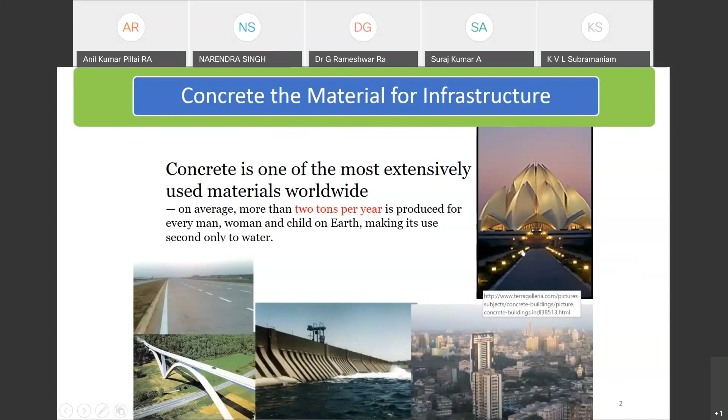So starting off, like I mentioned, I'd like to talk about innovations in concrete for sustainable construction. So what is this material? It's actually the second most widely used material on this planet. It is second only to water. It's about 2 tons per year for every human on this planet. So in terms of its usage, it is enormous. So obviously that comes with a very large footprint. And for us to be sustainable, we have to look at the issues that come about from the usage of this material. Now, concrete is made with cement.

If you look at cement, the past, present, and the future, this is the cement production as it was 2 decades back, what it is today, and what it is expected to be in the future. The red is the Chinese dragon; they are the largest producer today, because of the enormous development in infrastructure in which they invested, which has allowed them to become the second largest economy in the world. Now the blue there is India, and we are on the cusp of enhancing our investments in infrastructure. The current estimate is about $2 trillion of investment has to go into infrastructure if we are thinking of becoming a $5 trillion economy.

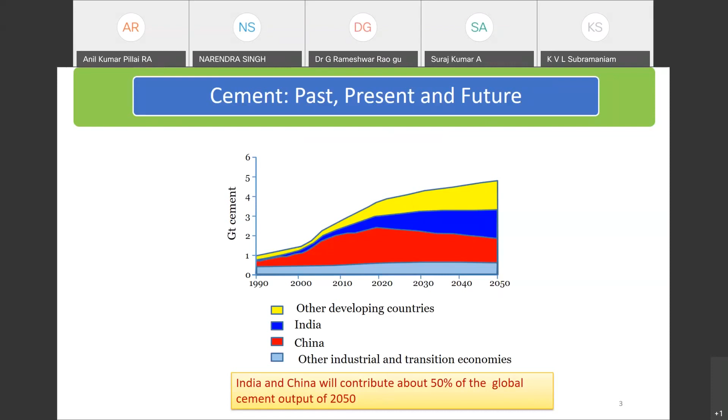And that is needed in critical sectors like infrastructure, primarily highways, roadways, transportation, structures, and water systems. This is all needed to support the growth that we are projecting. The 7-8% growth that we want in our economy will only happen if we have the infrastructure to support it. That infrastructure can only be developed if we keep producing concrete, and that concrete can only be produced if we keep producing cement. The projection for India is by 2050, we'll probably be the largest producer of cement. Of course, this is a projection. And to sustain it, we need to find the challenges in continuing this production assuming the business as usual model, or do we need a disruptive change? Now, what are the biggest challenges in cement production?

Well, one of the biggest challenges in cement production is raw material. If you look at our projected demand of cement in 2050, we need 750 million tons per annum, and that is an enormous demand. Limestone is a critical ingredient that goes into making cement, and our best estimates are that limestone is going to last us another 35-40 years, which means the business as usual model will not work. We have to look for alternate solutions, alternate materials, alternate cements, because there is a material limitation.

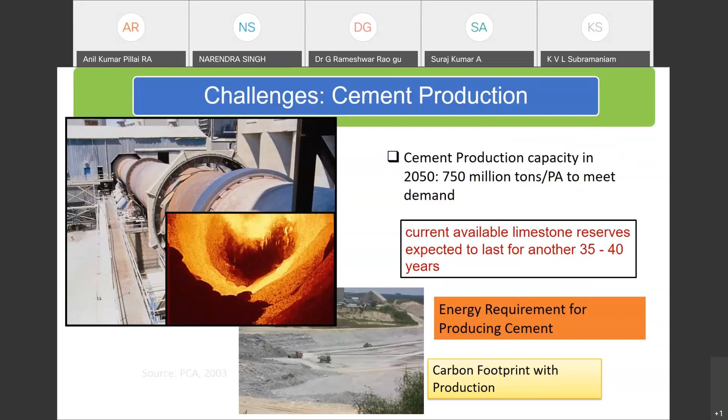Cement is a material that has a very high energy requirement, and we have to gear up to be able to produce the energy. And as a material, it has a very large carbon footprint. In fact, it is the second or third largest anthropogenic source of carbon dioxide in the atmosphere. So it has a very large environmental impact. These are the current challenges, and the cement industry has to gear up, because without cement there is no concrete, and without it we will not be able to produce the infrastructure that we need. So what about construction? We are still stuck in the old form of construction, particularly with concrete. We still assemble formwork on site, then we pour concrete, we let it harden.

It's a 28-day process. So A, it is time consuming. B, I am limited to what I can produce in the field. And oftentimes that is not the most efficient use of material.

So when I'm talking about rectilinear shapes, primarily rectangular shapes, most of our beams and columns are rectangular, and that is driven by constructability, because this is what we can construct with ease. But these are not the most efficient structural shapes, which means we're using material more than we are required to, and of course that increases the material demand. So we need better forms of construction which allow us to go and produce shapes optimally designed structurally.

And suppose I wanted to produce a shape as I've shown here on the left hand side, producing that on the field is not possible, which means we need to come up with new construction technology, which basically takes us into a new domain of form-free construction, where we are talking about construction without the use of formwork. And that's a new challenge that has come about from the construction side of concrete.

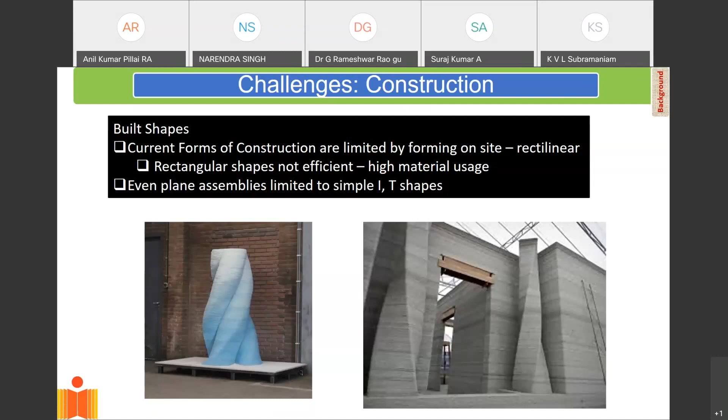Then we're talking about challenges in construction. We're talking building faster now, because gone are the days where we would like to wait for years, and quick turnaround has become important. And some of the stumbling blocks that we encounter when we're building faster with concrete is on site. While forming on site is an advantage, it's also a disadvantage, because I have formwork cycle times.

Basically, formwork takes time to assemble, then it takes time to disassemble. I need skilled labor. And of course, reinforcement has to be integrated with it. So it's a time-consuming process. And oftentimes, this is what slows down concrete construction.

So we really need to look at this in order to have efficient construction, which not only addresses the material demand, that is, we use the material in a very efficient manner, but also have efficient construction technology, which allows us to build faster, essentially getting into the domain of looking at construction maybe from a manufacturing perspective.

So looking at construction technology and bringing in newer forms of construction technology, which allow us to overcome these traditional roadblocks which have come about from the traditional way of thinking. So we have to start looking at things more from a manufacturing perspective. And we are heading in that direction, where now we're talking about additive manufacturing and 3D printing of concrete, where a lot of research is going on. And slowly it will become mainstream in construction.

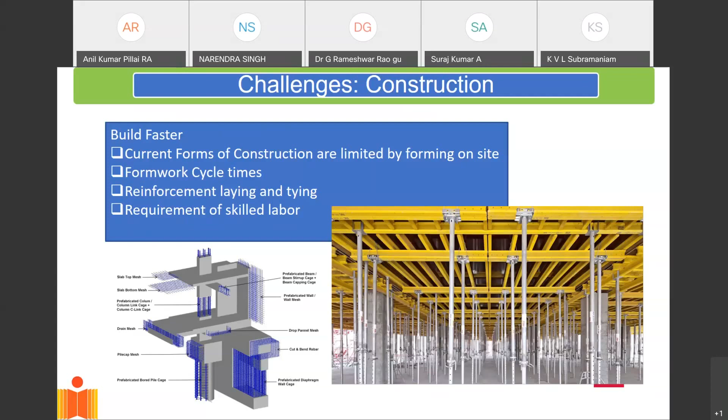So what are the solutions? I've listed the problems. Now, clearly cement is the backbone. We have to look at cements. So we have to look at alternate cements. So we have low clinker factors, and clinker is what goes into making cement. It is the essential material that goes into making of cement. Clinker is ground to produce cement. So we have to minimize our clinker usage in cements.

That will lead to a reduction in the cement utilization and will allow us to stretch our resources for more time. The other alternative is to look at alternative clinker-free cements. So look at cements which are not produced using limestone or using the Portland cement manufacturing procedure, but maybe making cements from waste material, which is the ultimate paradigm in sustainability, because then we are very sustainable. We are essentially utilizing waste material from other industry to produce something that is useful in our particular usage.

Then alternate reinforcement, and this is one of those things that is now being thought about, because if tying of reinforcement, laying of reinforcement is a problem, then maybe we can think of integrating reinforcement with concrete at the time of mixing, and then providing reinforcement as and when it's needed. This also allows us to bring in alternate forms of construction technology.

Efficient construction. So we are talking about identifying the labor intensive processes which slow us down, and looking at form-free construction, basically printing concrete, delivering concrete in the shape we want, shapes which have been optimized for structural efficiency, so that we use the optimal amount of material and not what is dictated by what formwork I can assemble on the site.

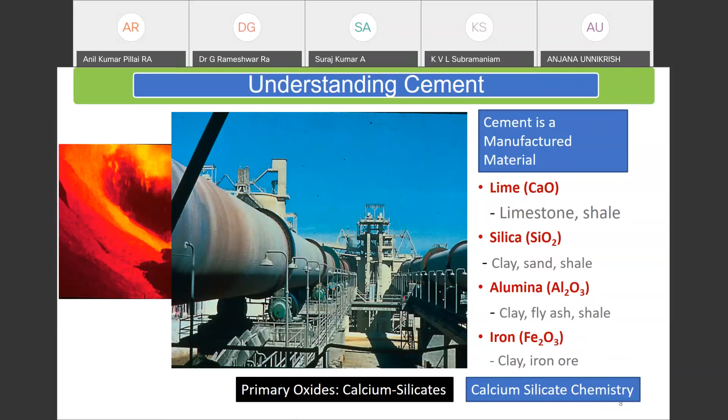It also gives off a lot of CH, which is calcium hydroxide, which makes concrete very alkaline. So basically, concretes are very, very alkaline. They produce a lot of calcium hydroxide. And the calcium hydroxide basically doesn't contribute to strength. It's just a byproduct of the reaction.

So one of the earliest attempts to reduce the clinker, which is what gives us these calcium silicates, was to look at this calcium hydroxide, which is sitting idle in the system, and utilize it by dosing additional forms of silica. And as luck would have it, we found additional forms of silica from waste materials. These are identified as slag, fly ash, metakaolin. Slag and fly ash especially are waste materials coming from other industries.

Slag is a waste material which comes about during the process of extracting iron from iron ore. And fly ash is what we get when we burn coal to produce electricity. It's the ash that is left behind. That is what we call fly ash. And both of these materials have silica in them.

So when I have an extra source of silica, which I add to the cement, that silica is able to utilize the calcium hydroxide that is given off by the cement reaction, and is able to produce additional CSH, additional calcium silicate hydrate. And these have been in use. So that has allowed us to reduce the clinker factor of cements.

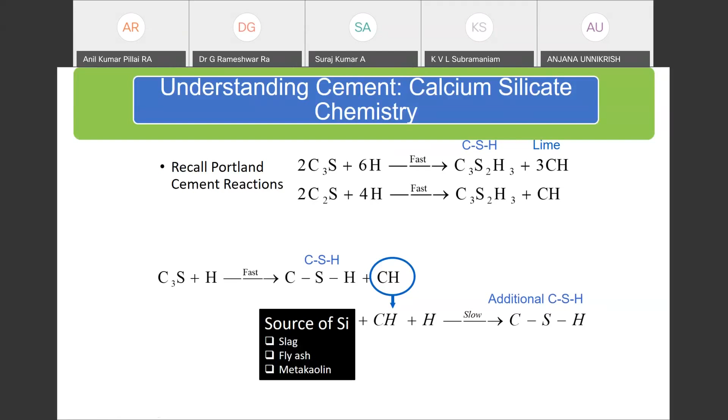And now the cement companies, working with the researchers and the standardization agencies, have standardized the addition of these supplementary cementitious materials. So slag, fly ash, metakaolin, these are all supplementary cementitious materials, which are used as a replacement of cement in Portland cement. So now this has become commercial, where we're able to reduce the clinker factor with the use of these waste materials.

So just to give you a little background of these waste materials, we use slag in a granulated form. It's basically the gunk that floats on top of molten steel that is quenched very quickly, and it produces a highly reactive glass, which is what we know as slag. And the slag is very rich in silica and calcium, which are the main ingredients of cement. And so we are able to use it as a cement replacement.

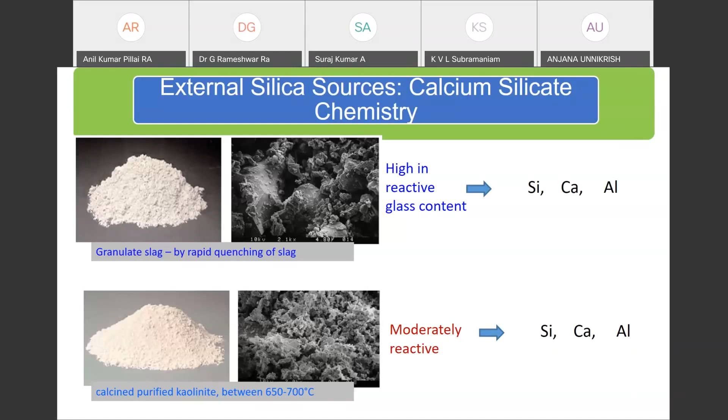Metakaolin is actually something that we produce by calcining clay. We calcine clay at 650 to 700 degrees Celsius. It's moderately reactive, but again contains silica and calcium. Therefore, we are able to use it as a clinker replacement.

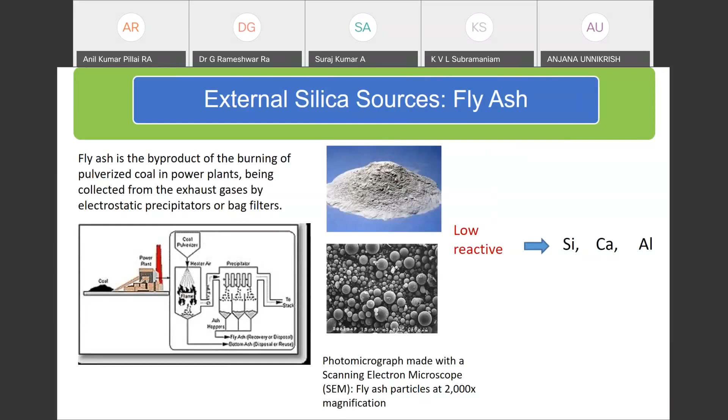But coming to fly ash. Fly ash is a waste material that is produced by burning coal, and it's a grayish powder. Fly ash is a low reactive material, but it contains silica and calcium. So if we look at silica replacement in cement, the way it works is that if I look at cement, I have calcium, silica, and alumina.

And if you look at any of these waste materials like slag or fly ash and metakaolin, they basically contain calcium oxide, silica, and alumina. And I'm basically looking to replace the silica in the cement with the silica that comes from these waste materials. So basically, as a silica replacement, this has now become very standard. Replacement of cement with these waste materials is now a very standard way of reducing clinker factor in cements.

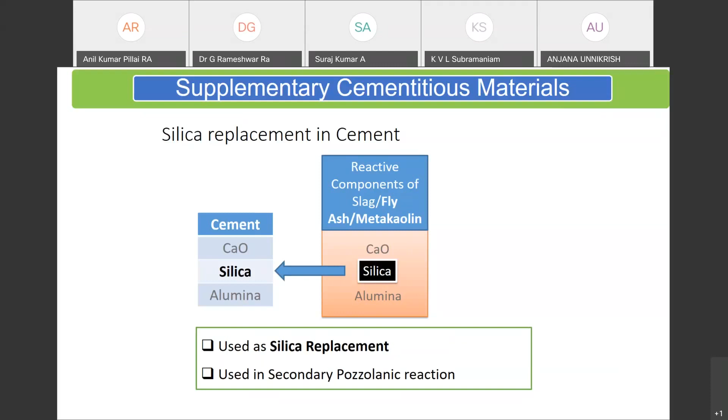The issue that we have is that the coal that is consumed in India is an inferior grade coal. So it basically produces a lot of ash. The ash content of coals tends to be as high as 50%, which means 50% of the coal that I burn is left behind in the form of ash. The average number is around 32%.

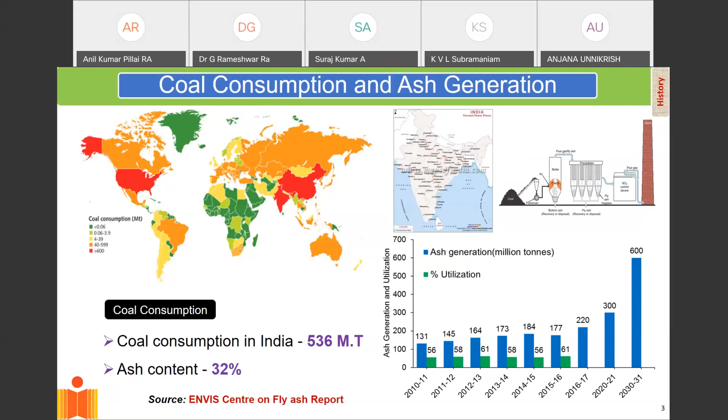But one of the challenges we have with fly ash as it is produced in India is the large variability. We have a very large variability in composition. I'll show this in the next few slides. There's a large variation from source to source. So if I collect fly ash from 3 different power plants, I'll get very different reactivities. I'll get very different compositions.

There's variability in the raw feed even if I look at the same source, because the coal that is burnt is different, it keeps changing. Even from the same source, the fly ash is not of a consistent quality or of a consistent composition. So that makes using this fly ash a little bit of a challenge. It is a low reactive material compared to fly ash produced in other countries; fly ash produced in India is not as reactive.

So we started studying fly ash just to understand it, to see how we could maximize the utilization of fly ash. And if you actually look at fly ash under the microscope, you see that it's a very complex material. It contains these iron-rich particles. It has a lot of quartz in it. And quartz is basically silicon and oxygen. Basically, it's silicon oxide. And a lot of the silica that is present in the fly ash is present in the form of quartz. And the problem with quartz is it is one of the most unreactive materials known to man. It is sand, basically. And sand, as we know, is not reactive.

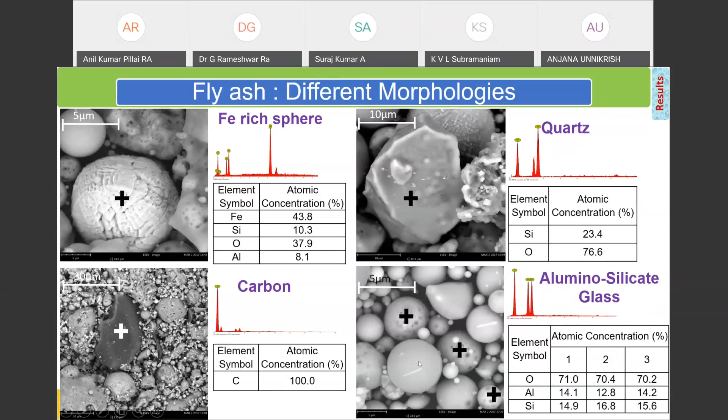If you look at the cenospheres, more shots of the cenospheres, it is this glass content in the fly ash that we're interested in. It is that glass content in the fly ash that contains the reactive silica that we can then use when we are trying to substitute clinker, when we're trying to cement with this fly ash.

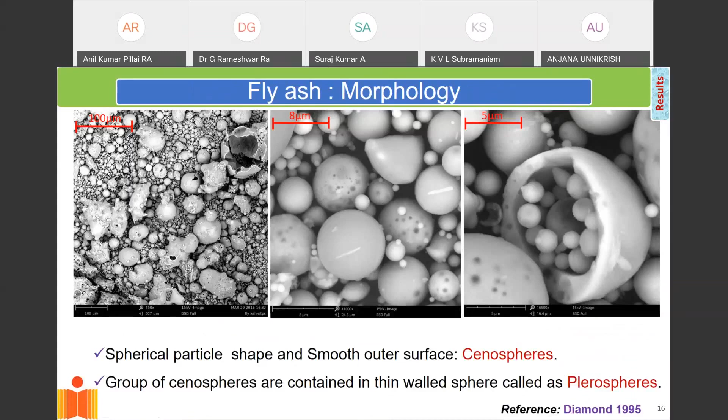The silica and the alumina contents by themselves are not indicative of the true reactive potential of these fly ashes. And reactive potential is important because when I'm looking at replacing cement, which is a very reactive material, I need to see how much of cement can I replace with fly ash. So therefore, I need to assess what is its true reactive potential. And unfortunately, just looking at oxides, we are not able to infer the reactivity.

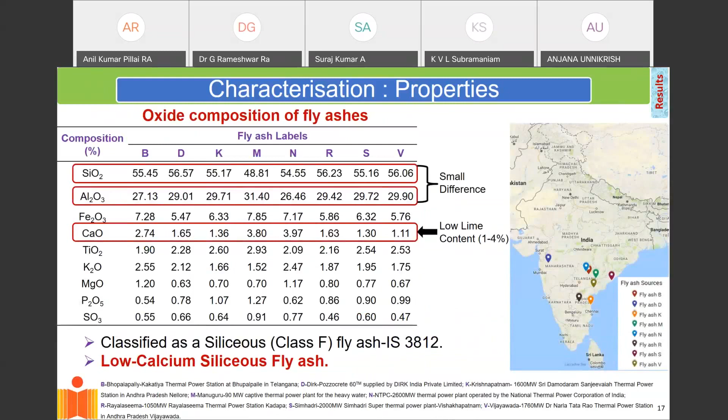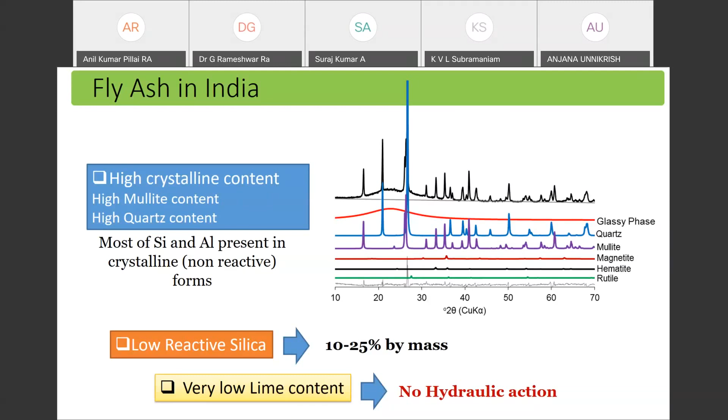And we found that, unfortunately, our fly ashes have low reactive silica in them - it's only 10 to 25% by mass of the fly ash. So if I take 1 kg of fly ash, only about 250 grams, or sometimes it may be as low as 100 grams of that total fly ash is present in reactive silica form, which I can then use as cement replacement. And because it has a very low lime content, it does not have any hydraulic action, which means if I mix fly ash with water, it is not going to react because there's no calcium present in it.

So we really need to understand our chemistry in order to optimize how much fly ash we can replace in cement. We've developed algorithms and procedures which allow us to optimize exactly the amount of fly ash that we can replace in cement, so that we don't compromise the properties of this blended cement, by looking at the reactive silica content that is present. The other thing I want to point out is the reactive alumina.

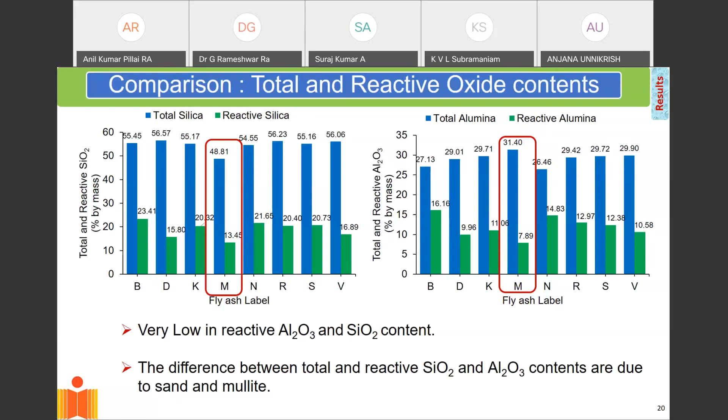Fly ash also contains alumina, and alumina is also a reactive material. Although in traditional cement chemistry, which is basically calcium silicate chemistry, we do not consider alumina, it is present there. If I look at total alumina in fly ash, it's typically anywhere from 27 to 30%, but the reactive form of alumina is always a much smaller amount. In traditional cement chemistry we don't talk about alumina, but when we start looking at alternate cements, alumina starts playing a critical role, and I'll talk about that in the next few slides.

So the fly ashes that we have in India - we are producing plenty of fly ash in India, but we are not able to use it. The biggest challenge is that we need to look at each fly ash individually, identify the reactive silica present, and then figure out the optimal replacement level of this fly ash in the cement. Some reactive fly ashes, we may be able to replace as much as 50% of the clinker with fly ash. The non-reactive fly ashes, we may not be able to go beyond 10% replacement.

So the code of practice currently caps off the replacement level at 35%. That's an average number that's given. But if we optimize it, we should be able to go higher or lower depending upon the reactive quantity present in the fly ash. But of course, that requires that we classify our fly ash - all the fly ash being produced should go through an oxide analysis, and then we determine what is the optimal use.

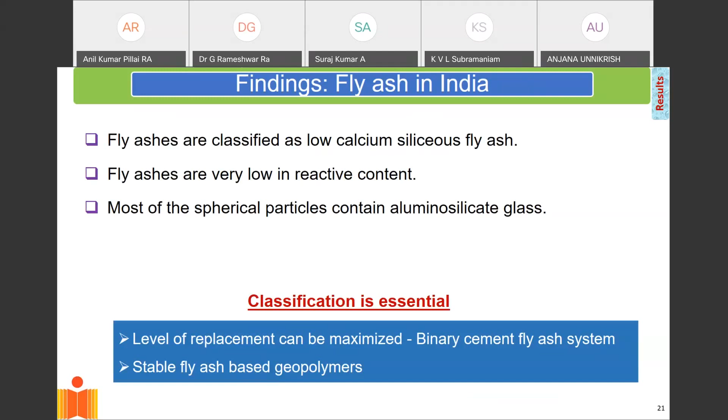Now, this is already in practice. If you look at ordinary Portland cement, clinker is basically what comes out of the kiln - when I burn limestone and clay together, I produce clinker, and it's ground with gypsum to give us ordinary Portland cement, OPC. But already in the market commercially, clinker is interground or mixed with fly ash, and it's available as PPC. We also add slag with clinker, available as Portland slag cement. The difference is that because slag is much more reactive than fly ash, we're able to replace a larger percentage of clinker with slag, whereas with fly ash we can only replace a smaller percentage.

This is already happening, these are already available in the market as PPC cements. Now, going forward, what other forms of cement can we use? The current form of Portland cement as we use it is 200 years old. The technology has not changed much, except for improving the efficiency of manufacturing, but the primary technology has remained the same - it's primarily calcium silicate chemistry.

Now what we're starting to look at is alternate chemistry, where we try to produce cements which are not calcium silicate based. The alternate forms we're looking at are alumino-silicate based - these don't rely on calcium as their base for strength, but rely on alumina. And if you recall, fly ash had a good percentage of alumina in it. So now I can start making these binders or cements using only fly ash, and that is the beauty of these alumino-silicate binders.

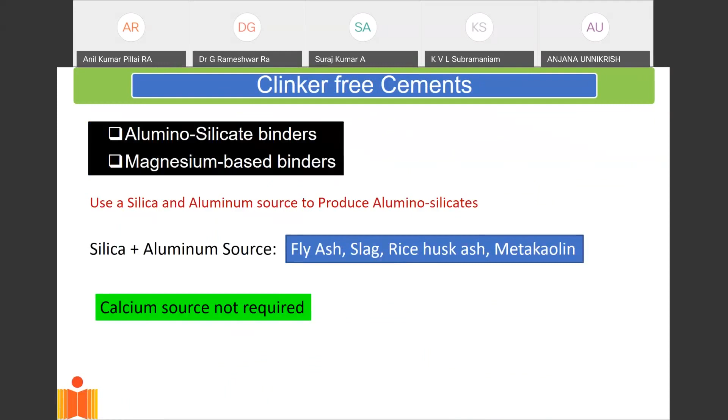Fly ash contains both of these, so I should be able to make cements using only fly ash. We also have other waste materials like slag, rice husk ash from burning rice husk, and metakaolin. These are all waste materials which can be used as a source for making cement without the requirement of clinker. So this is alternate chemistry at work here.

The way it works is we start with fly ash, which contains reactive silica and alumina, and activate it with alkaline activators. We mix it with highly alkaline solutions of sodium hydroxide and add some sodium silicate, which is water glass, used in the manufacture of soaps. When subjected to a little temperature, about 60 or 85 degrees curing, we're able to produce a binder called NaSH, sodium alumino-silicate hydrate, which is stronger than cement-based binder. This uses basically no energy in processing except a little temperature for curing, to produce binders stronger than cement.

These alternate binders have been researched quite extensively in the last decade or so, and now they're slowly finding their way into mainstream use. The other alkali-activated material we're talking about is alkali-activated slag. You start with slag, mix it with an alkaline activator, and because slag contains a higher percentage of calcium, we produce a binder which is calcium alumino-silicate hydrate. So again, there's no cement in use here—it's a binder made completely out of slag.

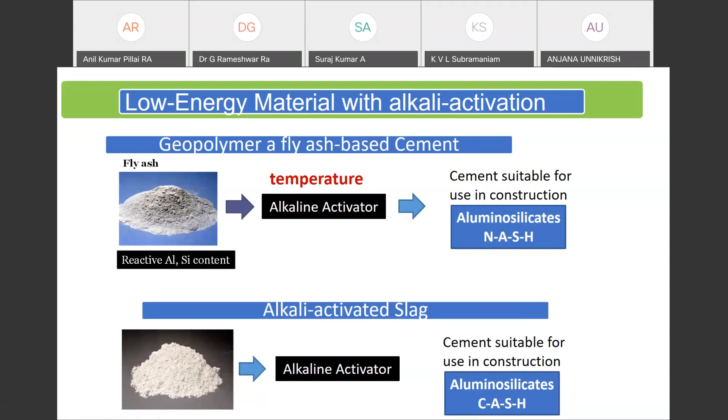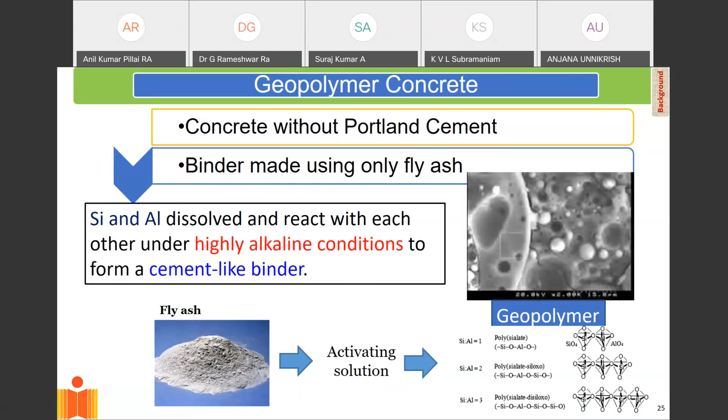These are alternate forms of binders that we are starting to experiment with, and the chemistry is very different from what we've been used to for the past two centuries, so it's taking a little time to evolve. We start with source materials and end up producing aluminosilicates, which also go by the alternate name geopolymers. Geopolymers are now being looked at as alternatives to cement for producing concrete.

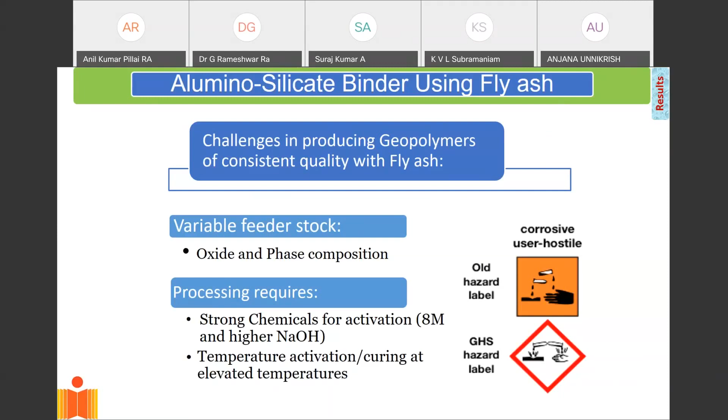One of the big issues is that currently the production of geopolymers happens in a very alkaline environment—I need 8 molar sodium hydroxide solution and higher. So people have been using very alkaline solutions, and these are very difficult processing conditions, because highly alkaline sodium hydroxide solutions are very pungent, very difficult to use, and very corrosive. A little temperature is also required for activation. That's the current challenge.

At IIT Hyderabad we've worked on understanding the chemistry—the reactive silica and reactive alumina present in fly ash—and developed and patented procedures that allow us to optimize the activation solution required. We start with the fly ash, characterize it, establish its reactive potential, and then optimize the dosage of sodium hydroxide. We're able to bring down the molarity of the processing conditions to 3 molar sodium hydroxide, which is far less corrosive than 8 or 10 molar sodium hydroxide.

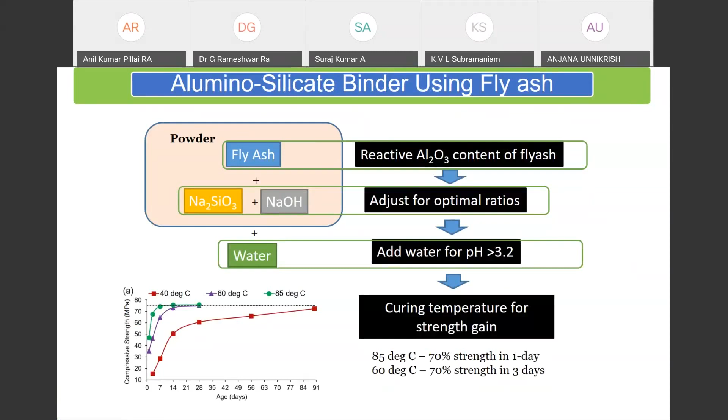It makes it friendlier to use with sodium silicate, and we're able to optimize it and produce binders giving 80 megapascal strength. So this is cement made completely using fly ash, activated with sodium hydroxide and sodium silicate, hitting compressive strengths on the order of about 80 megapascal. We're also able to bring the processing temperature down to 40 degrees Celsius, which is basically a hot summer day in India, and still get very strong material for making concrete.

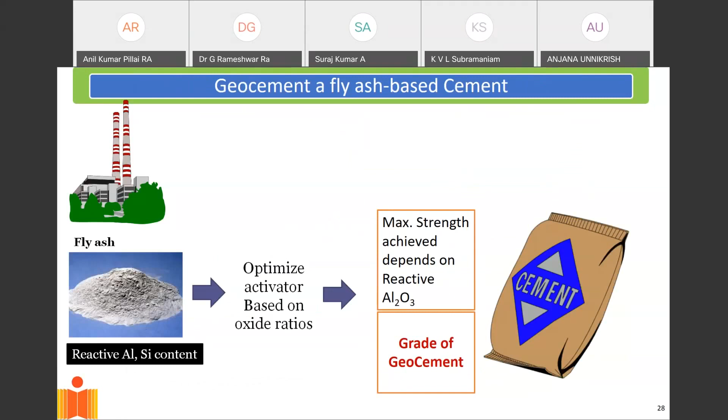This process has now been developed by us, where we take the fly ash, optimize the binders, and package this material in the form of a cement, where you simply take it, mix it with water, and use it to make concrete which is very, very strong.

To overcome the problem of requiring temperature—since even using only fly ash we need about 40 degrees—we've developed a room temperature cured material that can be cured at room temperature, about 27 degrees, by blending fly ash with slag. We take fly ash and slag, then optimize the binder—the sodium hydroxide and sodium silicate needed—which gives us the calcium alumino-silicate hydrate.

And we're able to achieve the same strength at room temperature. So now we have this product that basically is stronger than cement, made completely out of waste materials, which can be looked at as an alternative to Portland cements. So this is a technology that is now coming into mainstream.

And what makes it sustainable is we are basically addressing two problems, where we are essentially finding a way to dispose of waste material, which currently is being produced in excess of its consumption. And second, we are tackling the issue of the energy and the dwindling of materials that is facing us when it comes to production of ordinary Portland cement.

And thirdly, the energy and the carbon footprint of these materials, which are alkali-activated fly ash and slag, are practically zero, because here we are essentially using waste material from other industries. So it basically is a form of beneficiation rather than a footprint of energy or carbon associated with it.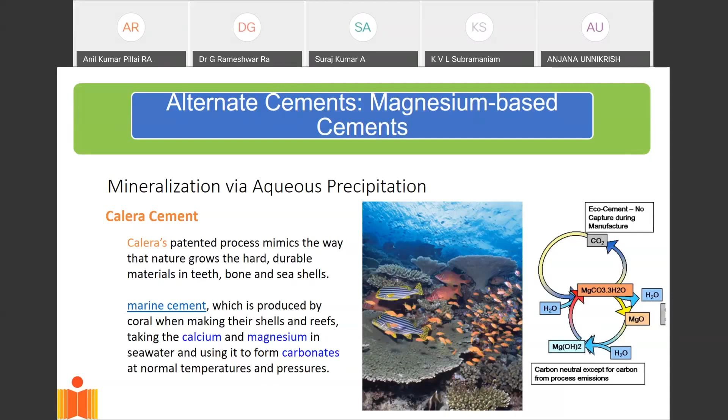Now, the whole point is to mimic this process, except speed it up. So there are processes being developed where we mimic this process, except it is produced at a much faster rate to give you magnesium-based cements. Several groups around the world are now working on these magnesium-based cements. Some patents have been taken out, and these are essentially magnesium silicates.

And one of the biggest advantages, as it's being touted, is that these magnesium-based cements also sequester carbon dioxide. It's presumed that every ton of the hardening cement would absorb about half a ton of carbon dioxide from the atmosphere. So these are all alternate developments of not only reducing cement consumption in concrete, but to look at alternate cements which do not rely on the old calcium-based chemistry.

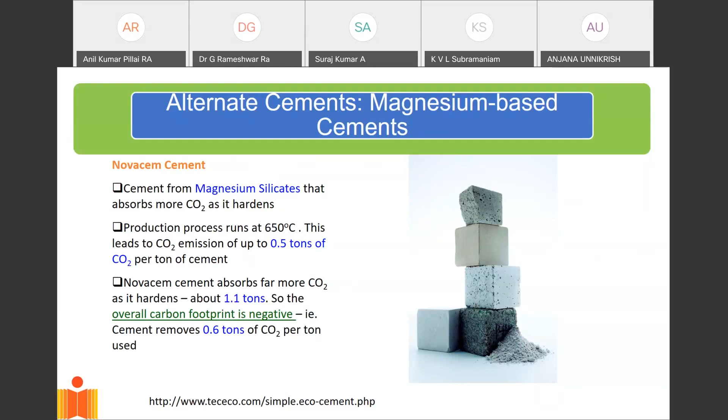One challenge that we face in mainstreaming these alternate cements is long-term durability. If I build something of it, and say 10 years down the road, it just crumbles, it starts deteriorating from some mechanism that we haven't seen yet. So we are starting to address this issue of durability. A lot of studies are going on to understand how durable these materials are. Because I cannot wait for 50 years to look at results, a lot of accelerated tests are going on to determine the durability of these materials.

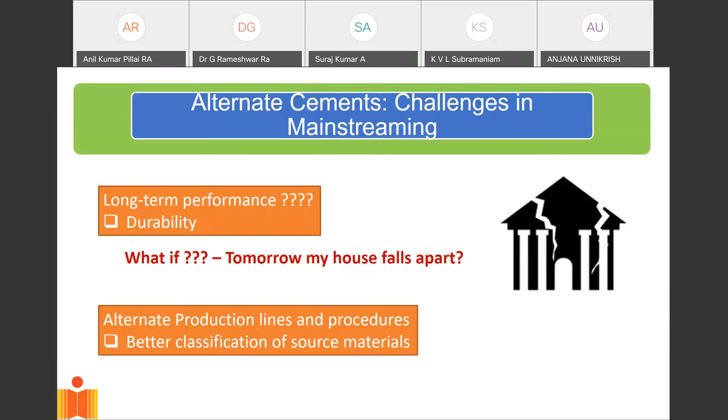And it's a matter of time until we have enough comfort in using these materials that they would become mainstream. In the meantime, there are alternate uses already becoming mainstream. The Geocrete, which is made by alkali activation of fly ash, is already coming mainstream because of several advantages. One of the biggest is that it's highly acid resistant. The geopolymers made by alkali activation of fly ash are extremely acid resistant.

So it's being used to make pipes which carry sewage or waste. Most of these pipes are made out of concrete, but concrete is very prone to attack by acids because the medium these pipes carry is acidic in nature. We are right now working with pipe manufacturers who make these pipes by precasting. Because of precasting, they use elevated temperature curing, so we would be able to use the same curing procedure, use temperature to our advantage to produce these precast pipes, but now made of geopolymers which are extremely acid resistant.

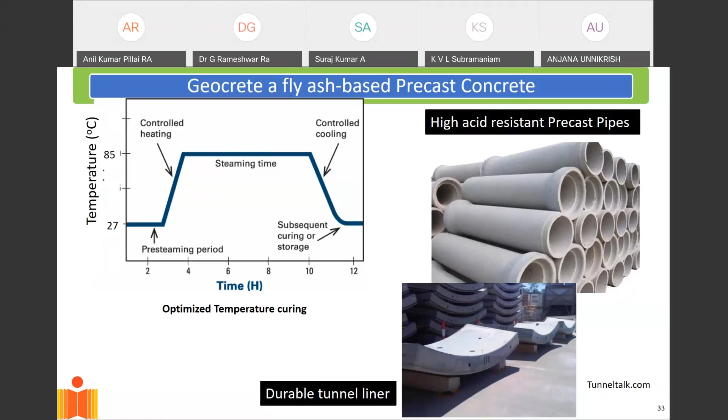We are also looking at tunnel liners, which are used to stabilize tunnels, lining tunnels behind tunnel boring machines, which are currently made of precast concrete, but we're looking at precast geopolymer liners.

The other application that we're looking at is energy. Now, this is energy gains into the building. In India, most of our energy concerns in buildings are concerned with energy gain into the building. And most of our energy gains come through the building envelope. The building envelope is the skin, the outside part of the building, which is in contact with the atmosphere.

And mostly it is in the form of non-structural walls and windows. So that's where most of our heat gains into the building happen. And conventionally, most of our building envelope is made out of masonry, conventional masonry, whether it is fly ash brick masonry or clay brick masonry.

Now, in terms of volume of usage, these non-structural masonry elements constitute a very large volume of the material that is used in a construction site. So it's a very large volume, and they contribute tremendously to heat gains in the building. And these are non-structural. Typically, these elements do not carry any load on them because they're used as infills inside concrete structural frames.

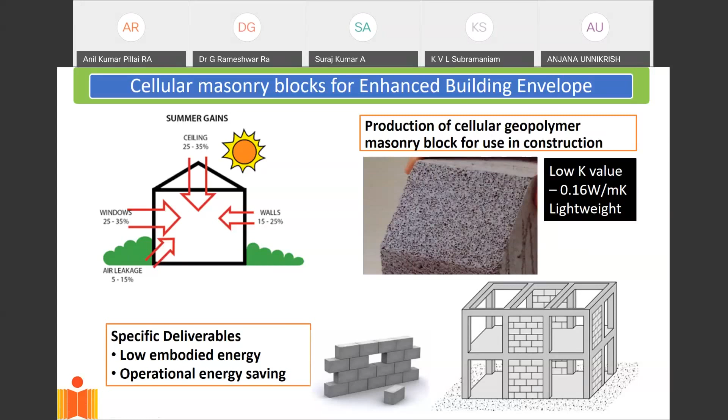Now, we're working on producing the cellular geopolymer. So basically, cellular geopolymer is where we introduce air bubbles into this geopolymer material. Introduction of these air bubbles basically reduces its thermal conductivity tremendously, and thereby we are able to reduce the heat gains into the building because it's a very low conductive material.

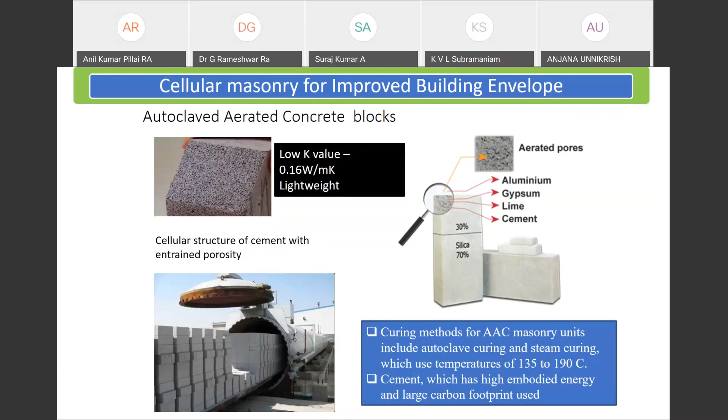And the current material that's in use goes by the name of autoclaved aerated concrete blocks. These AAC blocks are conventionally made with cement binder. So we use cement, and in the cement binder, air bubbles are introduced, and then they are cured in an autoclave. Now we are basically using the same process of autoclaving, except the base material we are using is an alkali-activated fly ash, derived completely from fly ash, and we are able to produce the same AAC, except they are now AAG because they are autoclaved aerated geopolymer blocks, which have very low thermal conductivity for use as non-structural masonry.

And we've gone one step further in producing these non-structural wall panels. We can now make these wall panels which are aerated and autoclaved, which have very low thermal conductivity. And using these wall panels now, we are able to also speed up construction. So this is one of the issues.

When we have a masonry infill, so this is a photograph that you would have seen before. This is the structural concrete frame, and you see the masonry infill here. So this masonry infill is a labor-intensive process. Usually, it slows down the construction of the building, and it is a non-structural element. If I can now make these in the form of panels, which are ready to assemble on site, these individual panels can be assembled much faster.

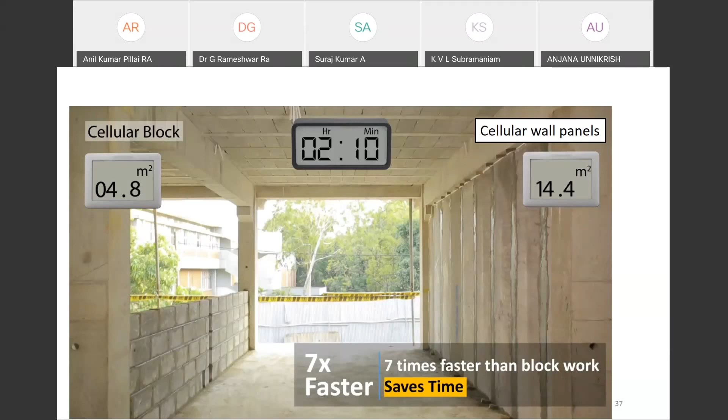They are made of a material which is of a very low thermal conductivity. So I have gains in terms of thermal efficiency. At the same time, I'm able to speed up construction, and it's almost 7 times faster, making my construction also more efficient. So this is another innovation that we are pursuing, which allows us to make construction more efficient and faster in order to meet our goal of faster construction.

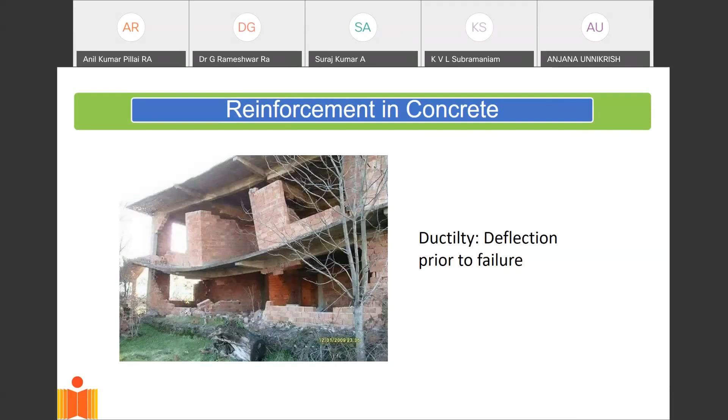Most structural designers, this is what we aim for: if I can design a beam which deflects but doesn't fail, that is considered a very good design. It's a very ductile design, and that's what we shoot for when we try to design our reinforced concrete structures. So unfortunately, in order to deliver that level of ductility, often when it's in demand in high seismic regions, we need a very high amount of steel.

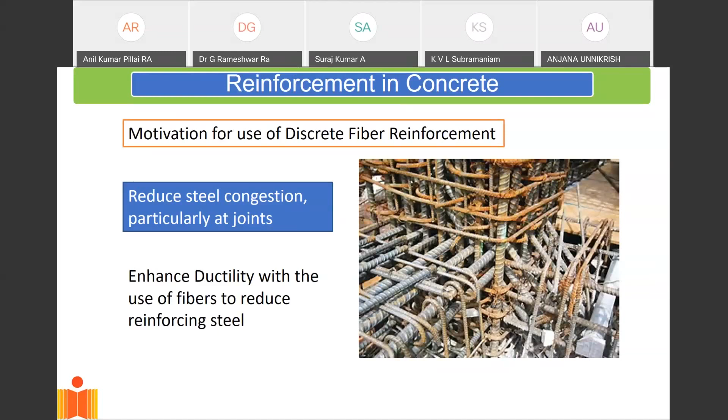And I'm just showing you a photograph of such a beam column joint. This is where beams and columns intersect. The requirement of steel is so high oftentimes that it becomes impractical. We don't have place to put concrete in there. So now what we're looking at is discrete reinforcement. So instead of having steel bars, conventional steel reinforcement, can we start looking at the same steel provided in the form of fibers?

The advantage is if I have a steel bar that is placed inside concrete, the steel bar is not effective till the crack comes and intersects the steel bar. So that means the crack has to form, and it only encounters resistance once it crosses the steel bar. Whereas if I take the same steel bar, chop it up into smaller fibers, then every time a small crack forms inside the concrete, it is locally arrested.

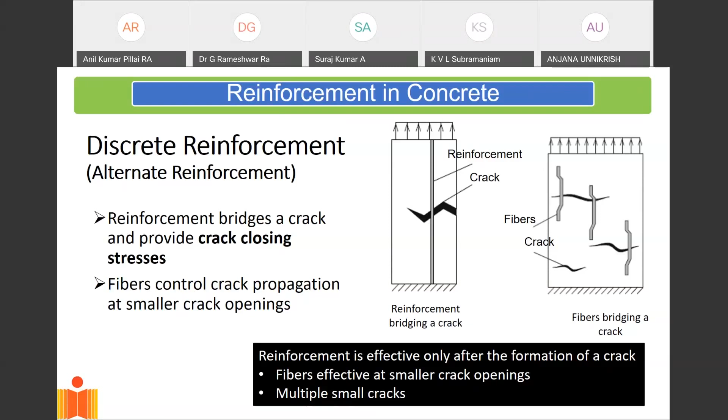And basically the local arrest mechanism allows me to enhance the ductility of concrete without having to, A, use more steel, and B, using steel in a friendlier format. Here the steel, when it's in the form of fibers, can be mixed with concrete and simply cast with concrete.

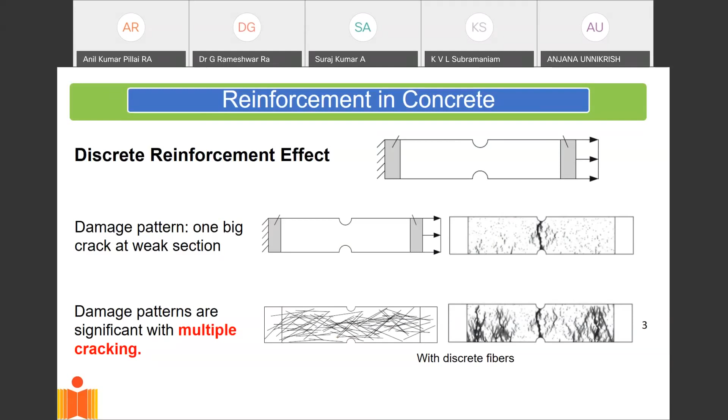And so the whole point of fibers is that if I have fibers, instead of one big crack being formed in reinforced concrete, I'll have 50 small cracks that are formed. Now, the rule when we're trying to deal with cracks is that 50 small cracks, if they're very small, will not allow water to get into concrete. And therefore, it basically also enhances the durability of the material. Whereas if I have one big crack, water can get in and steel will start corroding.

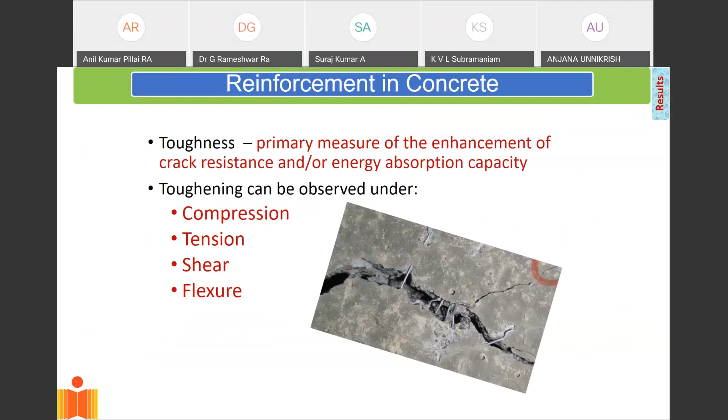So this is the role that these steel fibers play. They toughen the material, they increase the toughness of the material. Now the material is able to absorb a lot more energy, and basically I'm able to design using this material. And one of the ways we look at toughness is to see how much effort it takes for us to pull the piece of concrete apart.

The minute I start putting some fibers in there, the fibers will arrest the crack, and at low dosage of fibers, I get some stress recovery. Basically, the fibers are able to hold the crack and actually give you some resistance as the crack is being opened.

And if I increase the fiber dosage, I can even get to the point where the resistance coming from the fibers exceeds the strength of the material. And when that happens, I get multiple cracking. So instead of having one big crack, I get 50 smaller cracks that are formed in the material.

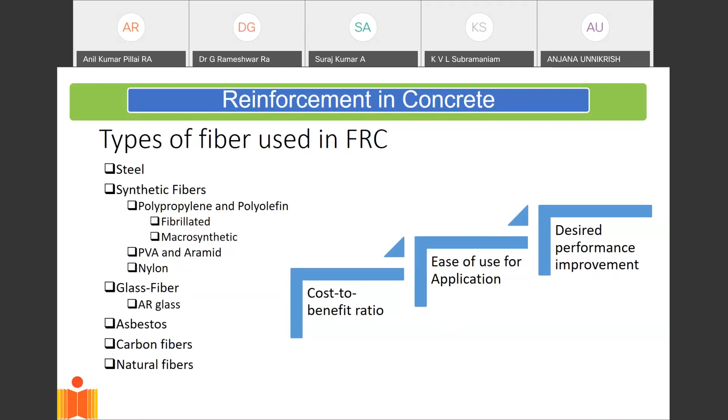So there are different types of fibers that are currently in use, and they range from synthetic to glass, asbestos, carbon, and even natural fibers. And of course, steel is the most prevalently used fiber. And the usage would depend upon the cost to benefit ratio, the ease of application, and whatever improvement I'm looking for in performance. Now, some of the uses of fibers currently are in shotcrete applications.

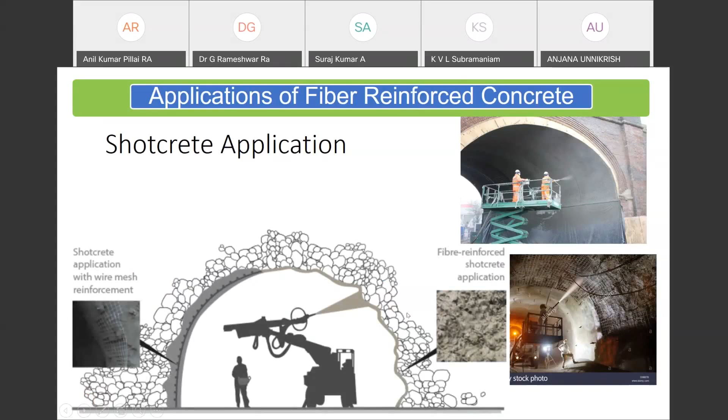Now, whenever we have tunnels, as the excavation or blasting takes place, the rock mass has to be stabilized. And the way it's traditionally done is using conventional reinforcement and then guniting. So one creates a layer of concrete, which is gunited using conventional reinforcement. Now, the newer application is to shotcrete it, where basically concrete is directly shot onto the blasted or excavated surface, and it contains fibers in it. So there's no need to put a reinforcing mesh.

And using this shotcreting technology with fibers, several tunnels have already been made in India, including the all-weather route in Leh, Lahul and Spiti Valley tunnels in Himachal Pradesh, and Jammu, where steel fibers have been used instead of conventional steel reinforcement.

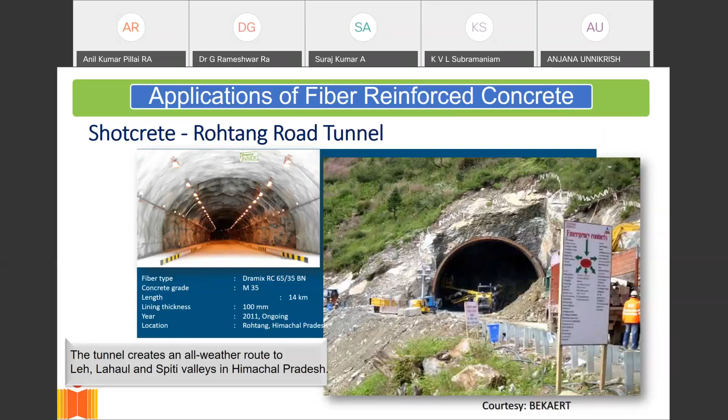Now, the other use of fiber reinforced concrete is in jointless pavements, and these are done for container terminal yards, where extremely heavy loads are piled onto very small areas of concrete. And these are large spans of concrete slabs without joints. And the only way we can keep the slab from cracking and those cracks from opening and becoming wide is by incorporating fibers. And now design procedures for these fibers in pavements are also being standardized so that they can be used.

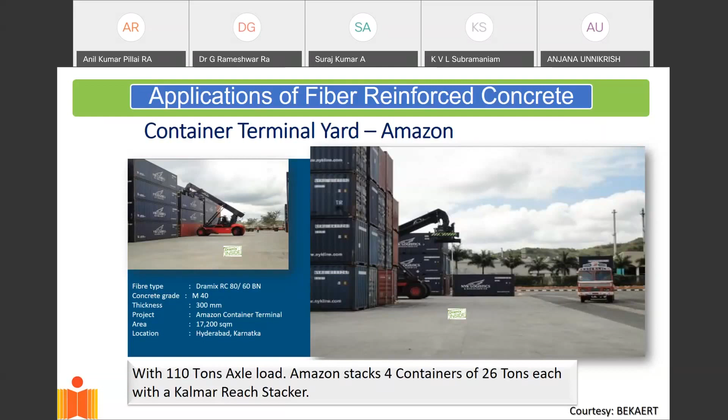And a live example of this is the container terminal yard of Amazon, which has been designed for super heavy loads. And it's essentially one big jointless pavement made with steel fibers in concrete. Metro tunnel lining, where the precast elements are now being made with fibers instead of conventional reinforcement.

The other area where fibers are finding big use is small synthetic fibers being used to cut down on cracking in concrete. Oftentimes, concrete cracks because of shrinkage, where when concrete starts drying, it cracks. And sometimes even curing doesn't help when these cracks develop. So basically, micropolypropylene fibers, very fine fibers made of polypropylene, are added to concrete at a very small dosage of about 0.2% of the volume of concrete, and they're able to mitigate these cracks.

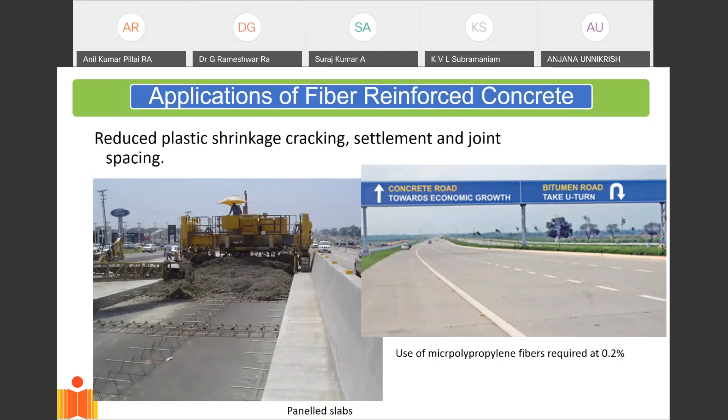And glass fibers have been used and are used extensively for architectural concrete because they're able to cut down on the appearance of the surface cracks that come when concrete dries.

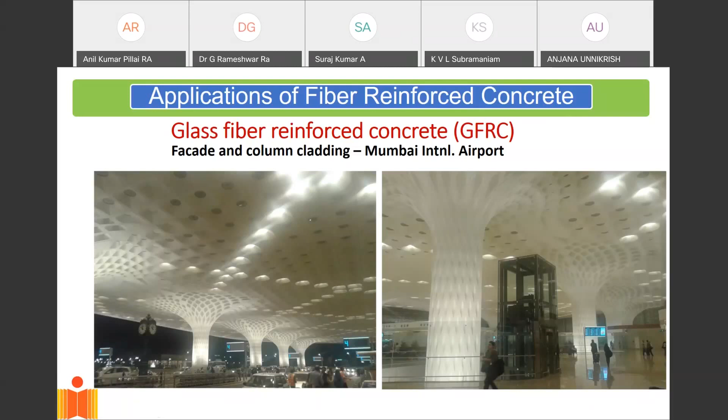And one big example of this has been in the terminal building in Mumbai International Airport, where the entire white concrete surface contains glass fibers, which keeps it from developing these pattern cracks, and one gets the look and feel of a flawless stone reproduced in this concrete. Architectural concrete is extensively done with glass fiber reinforcement in here.

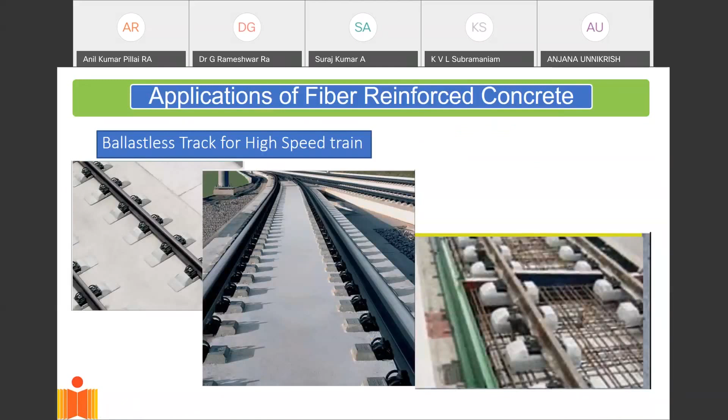One more application of fiber reinforced concrete is in ballastless track technology for high-speed trains. The conventional design, which is patented, basically calls for very heavy steel reinforcement. Now, with the use of fibers, there's a project where we were able to bring down the utilization of steel. So now we're able to use steel much more efficiently.

By using macro synthetic fibers at about 5 kilograms per cubic meter of concrete, we are able to reduce the steel consumption from 1347 square millimeters per meter of the pavement to 785, basically dropping it down to almost half of what was initially added. At the same time, without compromising the crack opening, we achieved a crack opening of 0.2 mm, which is within the serviceability requirement specified in the Indian code.

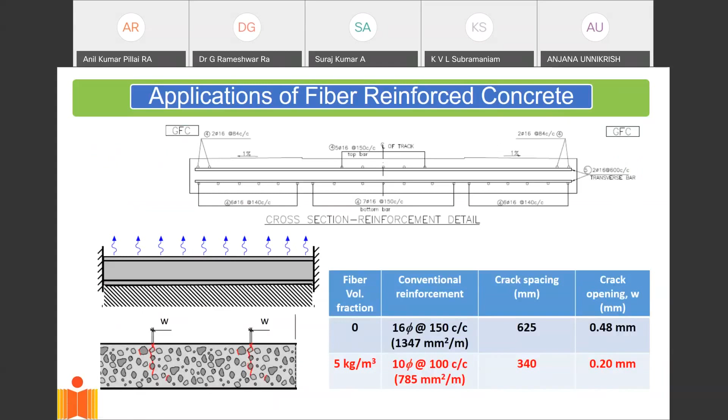So these are essentially the applications of fibers, which up to this point have been non-structural. But now fibers are also coming mainstream in structural applications, where if I add fiber to concrete we look at improvement in the shear performance of concrete. So we've tested concrete beams without shear reinforcement. Without shear reinforcement, a concrete beam basically fails in shear.

So Vf equal to 0 is where I have no fibers in the concrete. But the minute I start adding fibers to the concrete, you see that I start improving the load resistance. The peak load starts increasing, and also the ductility starts increasing. So at about 0.75% volume fraction, 0.75% of the total volume of concrete is in the form of these steel fibers.

We are able to achieve a tremendous improvement in the shear capacity and also produce a nearly ductile response where the load remains constant for a very large amount of deformation. So this is mainstreaming of fibers in structural applications. This is as far as conventionally mixing fibers as alternate forms of reinforcement in concrete, which would allow us to reduce the requirement of conventional reinforcement bars in concrete.

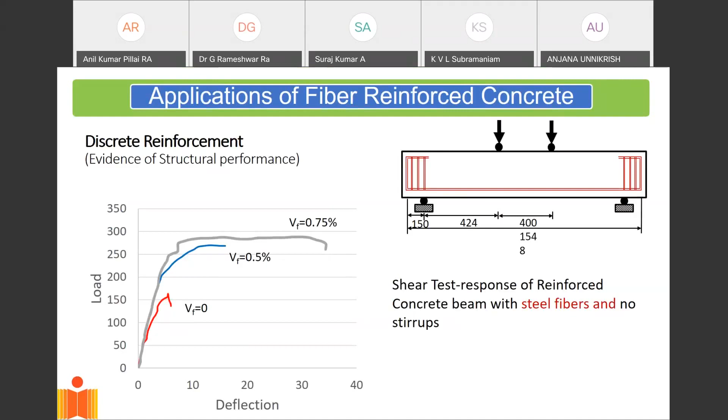Now, as we're progressing, alternate forms of concrete are also finding their way into mainstream applications. One of the main applications deals with ultra high performance fiber reinforced concrete. This is a form of concrete which is engineered. We start looking at the material from the nanoscale, engineer it at the nanoscale, and then at the micro scale and the meso scale, and we get tremendous improvement in performance at the macro scale. And this is done by packing of the material.

We pack the material by carefully paying attention to the different scales, packing at the nano, micro, and meso scale. We introduce a very high fiber volume into the material through processing, and I'll talk about processing in the next few slides. By doing so, we are able to produce this UHPC, ultra high performance concrete, which gives us very high tensile strengths of about 30 megapascal and a very ductile response. It cracks, but it does not fail.

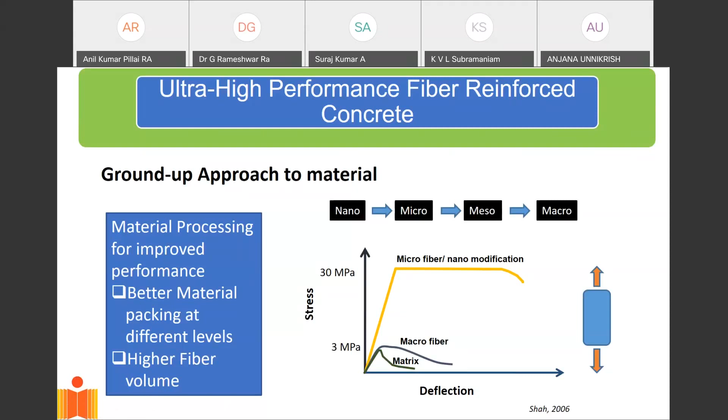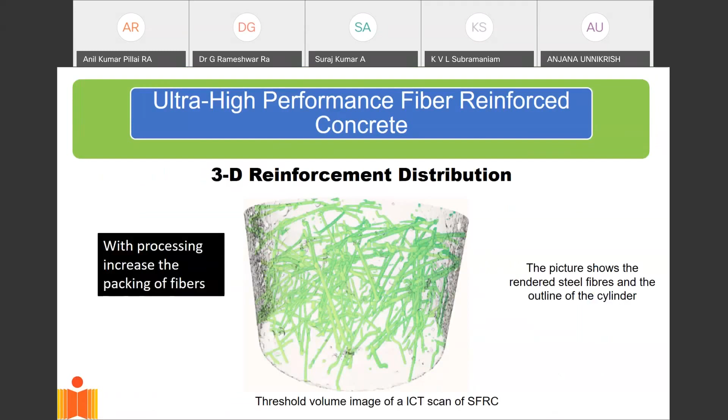And this UHPC can only be achieved by processing, which requires packing a lot of fibers into a volume of concrete. I'm showing you a CT scan of one of these UHPC materials, with a very high fiber volume packed into a very small volume of the material. And one is able to achieve this level of ductility. This is a small, very thin beam made of UHPC, which starts deforming like a steel beam. So what do I gain from this?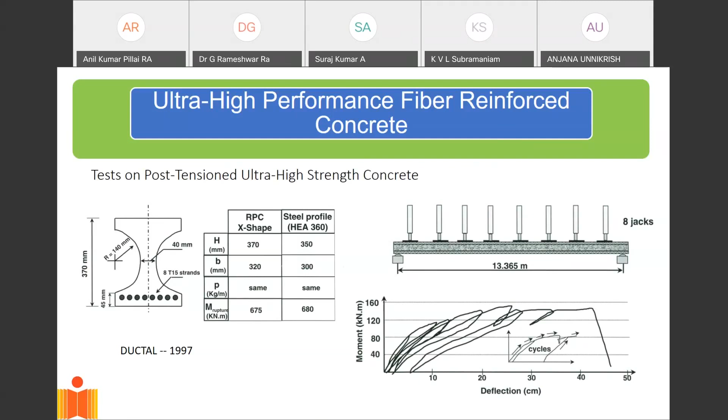And just to show you an example of a real beam that was tested, it is about 13.4 meters in length. It's a pre-stressed beam, and we were able to achieve behavior that essentially resembled a steel beam. This ultra high performance concrete is now being pushed into mainstream.

The advantage we gain is that now this material is very strong in tension. It is very ductile. We're able to get much better forms. We of course don't need any steel reinforcement in there because now this material is packed with fibers. And basically we are able to achieve much more slender structures.

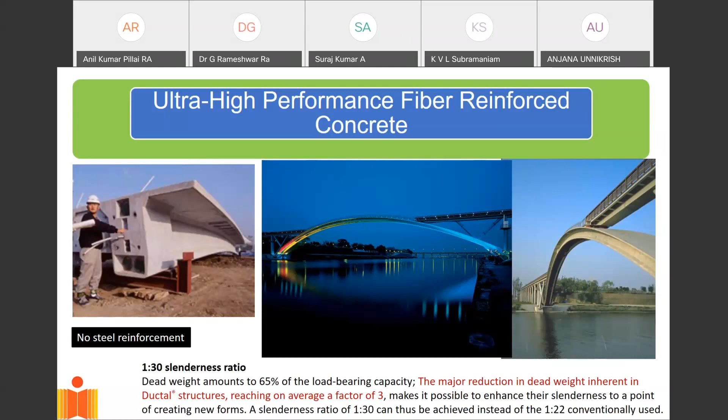Advantages we gain is much less use of the material because this material is so efficient. We are able to use it in much lesser quantity and give structures which perform on par with or better than conventional structures. So just to summarize on the alternate internal reinforcement, it is finding its way. It's being mainstreamed.

One of the biggest challenges we have is lack of design codes, because this is new. The design codes have not kept pace. Also, our conventional design procedures are strength-based. We have been taught about strength. We only think in terms of strength. But when we start using alternate reinforcement, we have to start looking at ductility. And that means that our codes have to be revised, they have to be updated. And that is work that is currently ongoing.

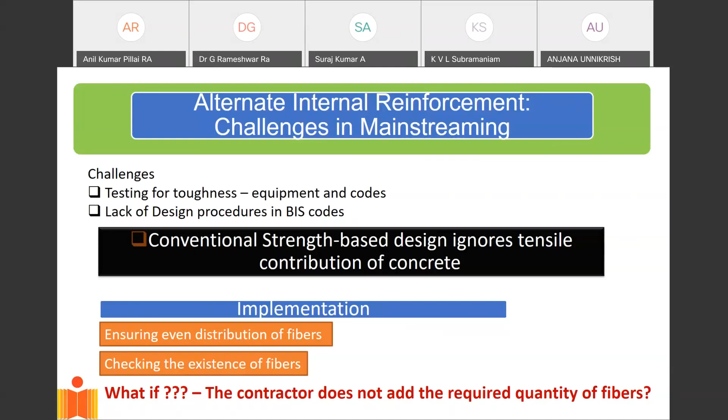Finally, I want to touch upon rapid methods of construction. There are alternate forms of construction that are coming mainstream, alternate forms with integrated reinforcement. So reinforcement which is integrated or knitted together in the form of 3D reinforcement. And this is being adopted in textile reinforced concrete, TRC.

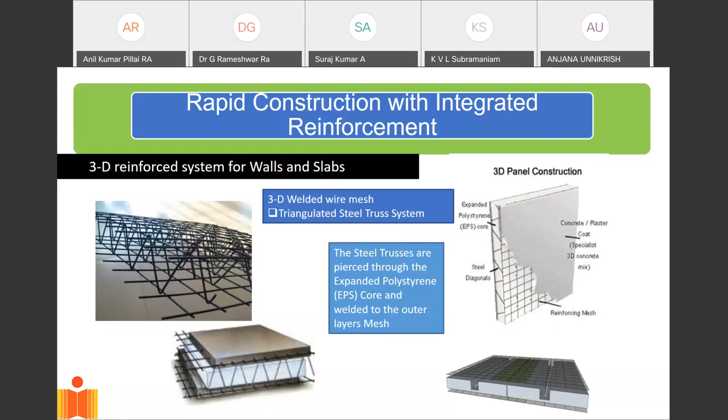And also in the form of metal reinforced concrete structures, where we have this 3D integrated reinforcement, which is factory fabricated. And then it is cast on-site in the form of two layers of concrete, which are separated by an EPS core. The EPS core serves the purpose of providing sound and thermal insulation. So overall, the construction is very fast. We can rapidly integrate these EPS panels with integrated reinforcement, and simply shotcrete or cast concrete structures, which are much faster and thermally efficient. So these are alternate forms of construction that are also coming mainstream.

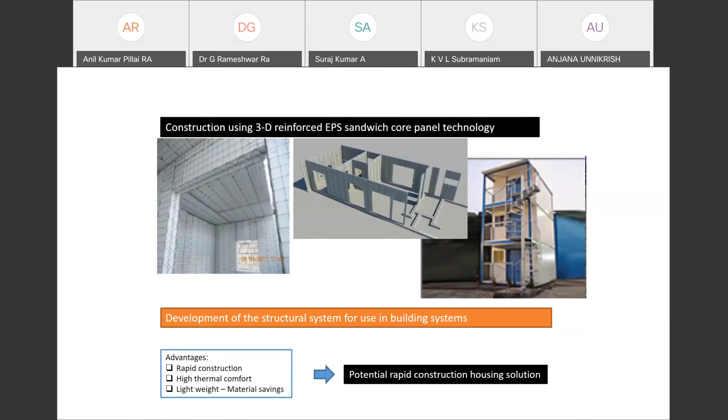Now, finally, I just want to touch upon this before closing, and that is, as we are going along, we are requiring our buildings to be taller. They have to be built faster, and of course, in doing so, we have to push the envelope in terms of overcoming the obstacles imposed by nature. We are pushing the envelope in terms of what we expect the material to deliver, what we expect the structure to perform against the elements.

The main structural system in Burj Khalifa is a concrete system. So concrete now is coming mainstream even in super tall buildings, and that is happening because of developments in technology. Now we are able to deliver concrete at 800 meters of height. Technology which allows us to take concrete 850 meters in height is now available, and that has revolutionized construction of these super tall buildings.

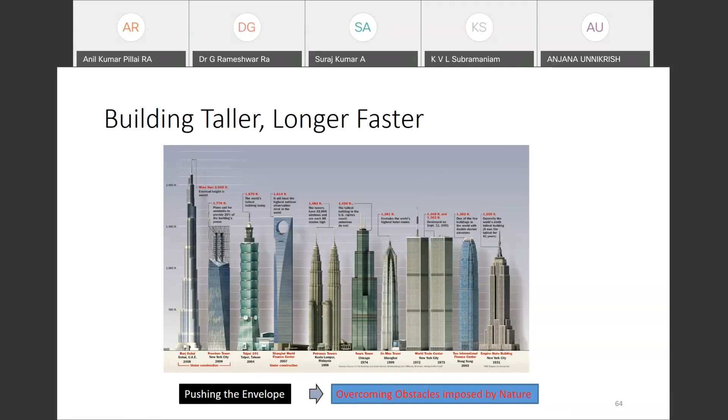Just to give you a snapshot, if you look at the super tall buildings, of the 100 tallest buildings in the world, 59 of them are in Asia and 23 are in the Middle East, which leaves only 18 in the rest of the world. So for once now, at least in tall buildings, Asia is leading. We have more tall buildings either under construction or completed in Asia compared to the rest of the world, and concrete is now the dominant material used in construction of these buildings.

Just consider the two tallest buildings, whether it is Burj Khalifa or the new building conceived in Jeddah, the Jeddah Tower, which is going to be 1 kilometer tall - basically the structural systems of these two super tall buildings are made of concrete.

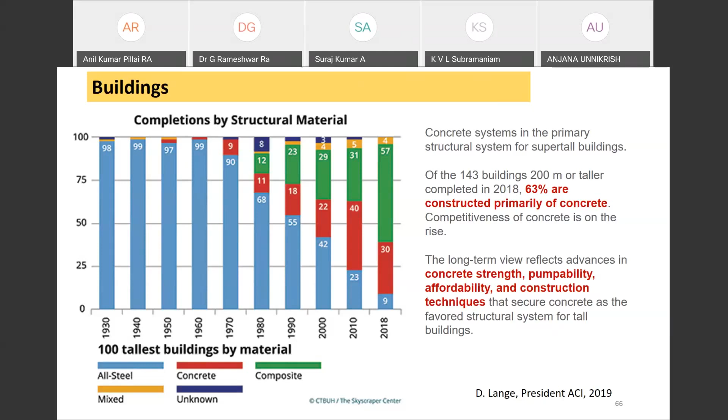This has happened because concrete has advantages in terms of strength, durability, and affordability. It is much, much cheaper than steel or other construction materials. But primarily, construction technology has allowed us to overcome the obstacle where now we can deliver concrete at 850 meters height or higher.

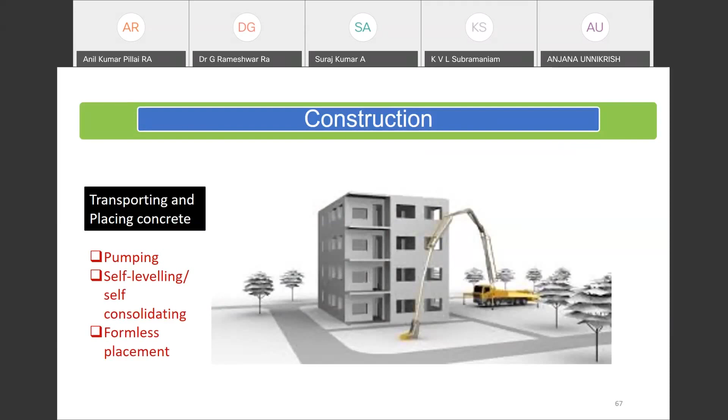Now coming to this last part of my presentation where I want to talk about transporting and placing. This is where, in the last 2 decades, tremendous development has taken place in the technology in terms of pumping, self-leveling, self-consolidating, and formless placement. So these are areas where construction technology, particularly with concrete, has made tremendous advancements in the last 2 or 3 decades.

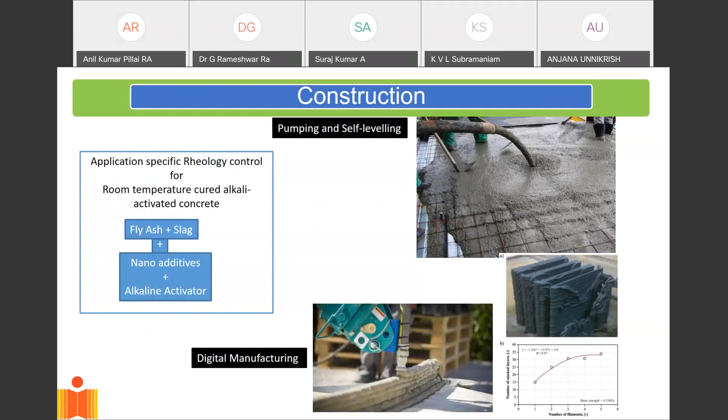So we're talking about pumping and self-leveling concrete - concrete that can be pumped to a great height and levels itself without any vibration. The next paradigm is looking at digital manufacturing, where we're talking about concrete which keeps its shape once it's pumped, so I'm able to make shapes out of it.

A little bit about self-consolidating concrete. Conventionally, the way we were taught concrete was in terms of increasing flow or slump of concrete. We only thought in terms of slump - the flow of concrete was never given much importance. So the way we were taught is basically to make concrete more fluid by adding water.

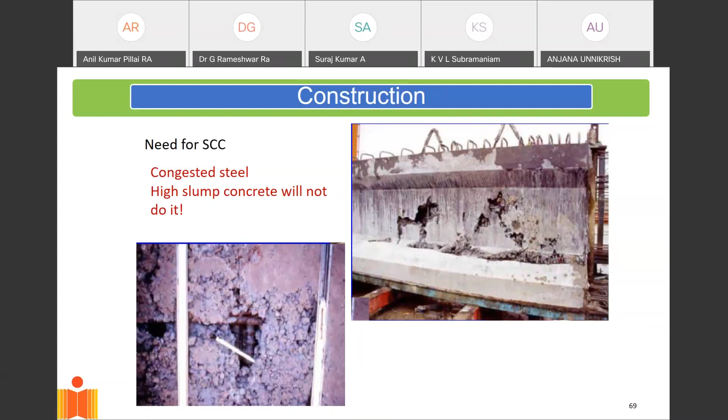The problem is if I add water, concrete tends to segregate. And when there's heavy congestion of steel, just having a high slump concrete will not do it, as I'm illustrating here. If I simply add water, I'll still have either segregation or honeycombs, where concrete does not penetrate between the steel.

More examples of a cast-in-situ pile where concrete just did not penetrate through the reinforcement cage.

I think there is a bandwidth issue, is it? He has suddenly gone offline, sir. Oh, is it? I think it's a bandwidth issue. Yeah, could be power or something. We'll wait for a couple of minutes, sure, 1 or 2 minutes. We will wait. But it is connected, I believe, no? It's connected, but there's no voice coming from his end, sir. Okay, Dr. Subramaniam, sir, can you hear us? We'll wait for him, sir.

Yeah, we'll wait. Sure. I think it is self-compacting concrete now. Yes, yes.

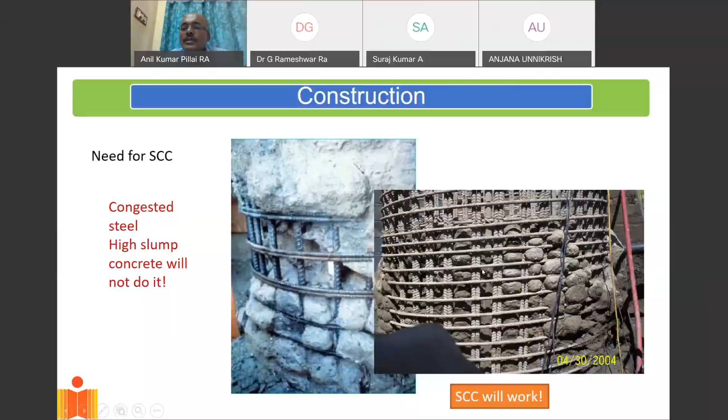But then, again, we need to look at the properties of fly ash in terms of what is mentioned in the IS code, in terms of lime reactivity, in terms of the fineness of the fly ash being used. So I think once we are sure about the properties of fly ash, then it can be used at site. But then we need to be cautious about that.

So I think that answers the first two questions. In the lab, we are able to get the 28-day required strength for M50 for 70% fly ash. Can we use the same in the field? That is something we need to look at by examining the properties of the fly ash and the mix design that we are using at site. Based on that, I believe we can use the proportion.

And what is the state of the art of geopolymer concrete? Yes, tomorrow at 11 a.m. we have again a webinar on geopolymer concrete by Dr. Bhikshma. I think he would be able to clarify on geopolymer concrete in detail, wherein fly ash is being used along with an alkali activator. So more on that in tomorrow's webinar at 11 a.m.